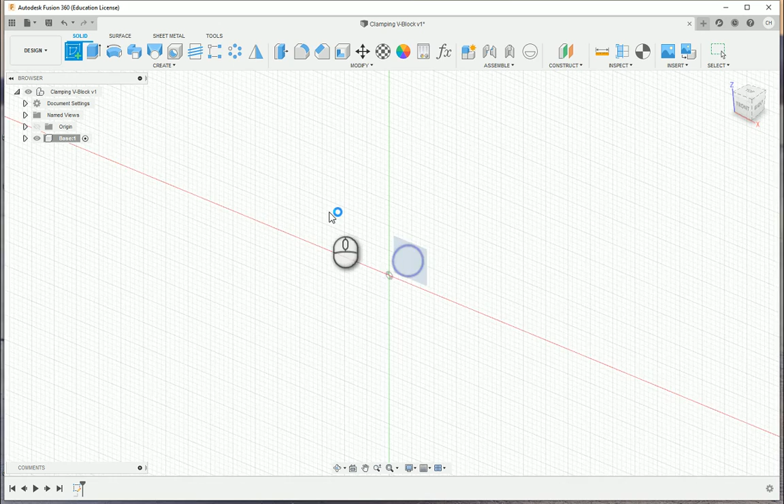So the first thing we're going to do is start a new component. I'm going to call this the base, and I'm going to go ahead and say OK. This is active now. We want to make sure the radio button is active in Fusion, and I'm going to go ahead and create a new sketch, and I'm going to choose the front plane. Before I start drawing, I want to make sure my units are set to millimeters.

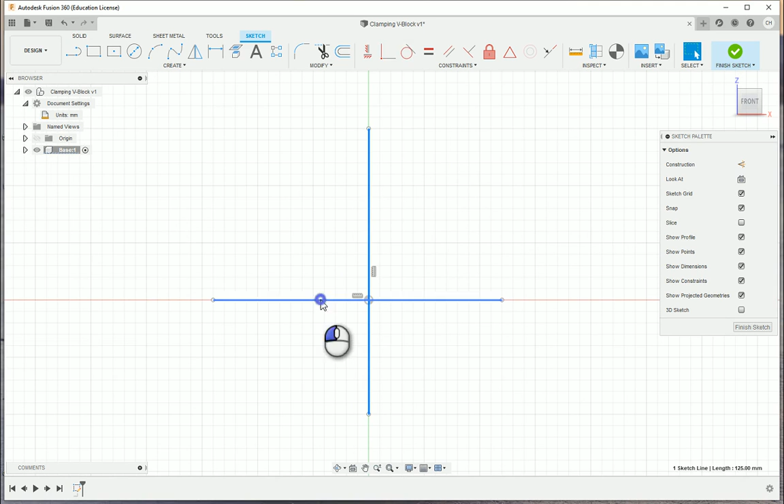And then from here, I'm going to create two lines. This is going to be a symmetrical part, and I'm going to develop two lines, almost like a quadrant system or a Cartesian coordinate system. I can select both of these and toggle construction. And then I'm going to use the midpoint geometric constraint, choose the line, and select the origin. The midpoint of those lines will be constrained to the origin. You'll notice how they turn black, and if I drag them, they can get larger or smaller based upon what size of sketch I need to create.

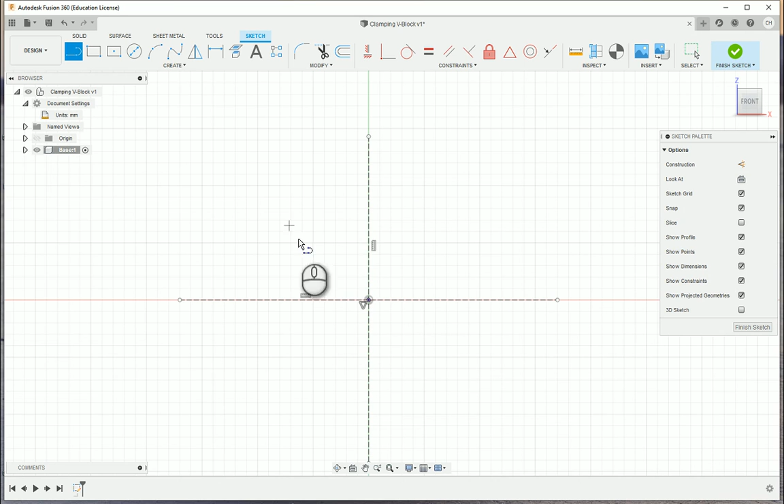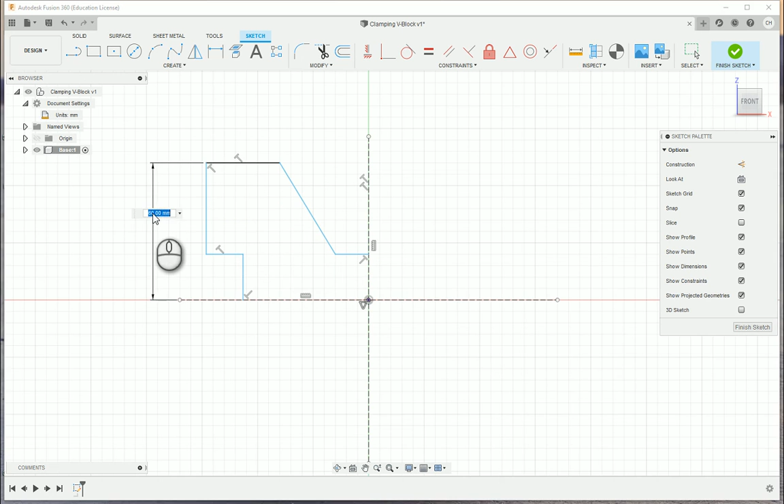But I'm going to end up drawing only a quarter of this part, and I can go ahead and start drawing some of that. One thing as we start drawing, you'll see that maybe our sketch will scale up or down. So just 1/4, and from here I'm going to go ahead and start dimensioning. The overall height of this part, and I'm going to use these lines, is going to be 30, so that's going to scale that down. It was about 60 when I drew it.

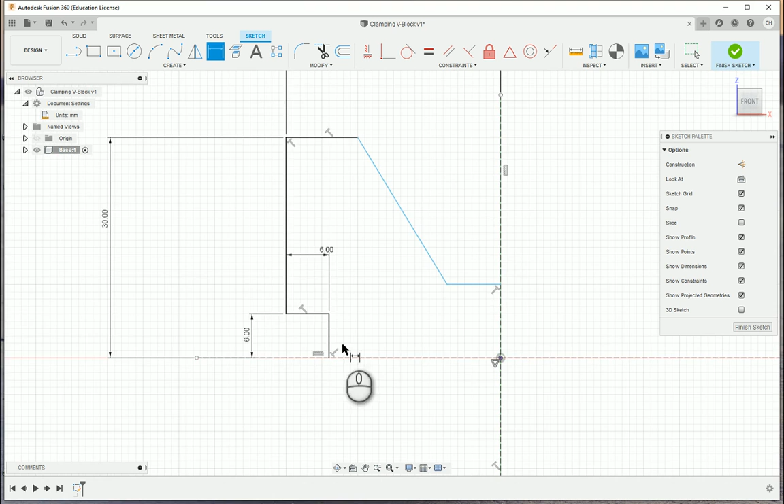And then the overall width, as I look from here to here, is also going to be 30. Now, some of this may change a little bit. You'll see this got a little bit shallow, but I can go ahead and click from here to here. This will be 6 millimeters. This height here will also be 6 millimeters. And then from this line to this corner, this is going to be 3. And then from this line to here, this will be 20.

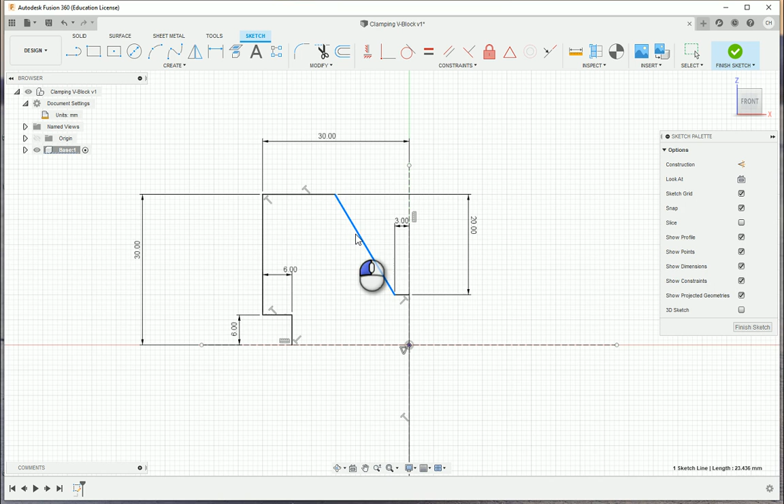Okay, so here's our problem: we may see that our line is still able to keep moving. So I think I did miss one dimension from here to here. This is also 20, and that will lock that into place.

Okay, before I move on to extrude, I'm going to go ahead and use the mirror tool, which can be found under the create panel. And it asks what objects I want to mirror.

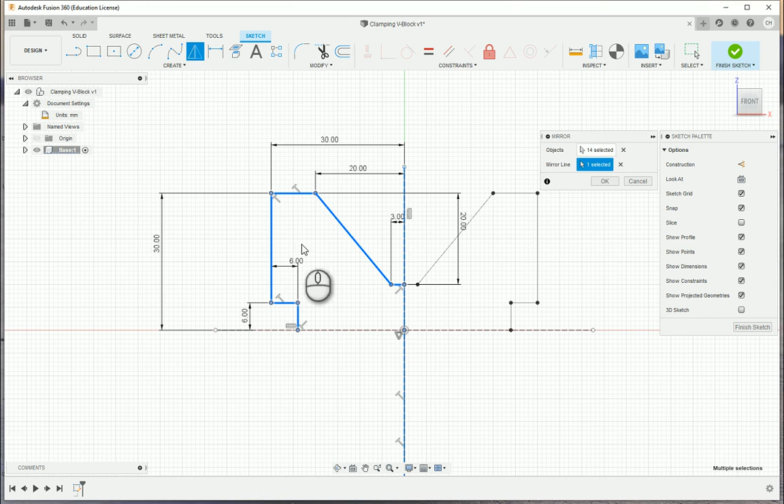I'm going to go ahead and click and drag to highlight all the lines that I need. And then I'm going to choose the mirror line. I'm going to choose this one. I'm going to mirror that over like so. I'm going to choose mirror one more time, highlight everything that I just did, and then choose this bottom line and say OK. Now we'll end up seeing that there's a full sketch there, fully dimensioned, fully constrained, and

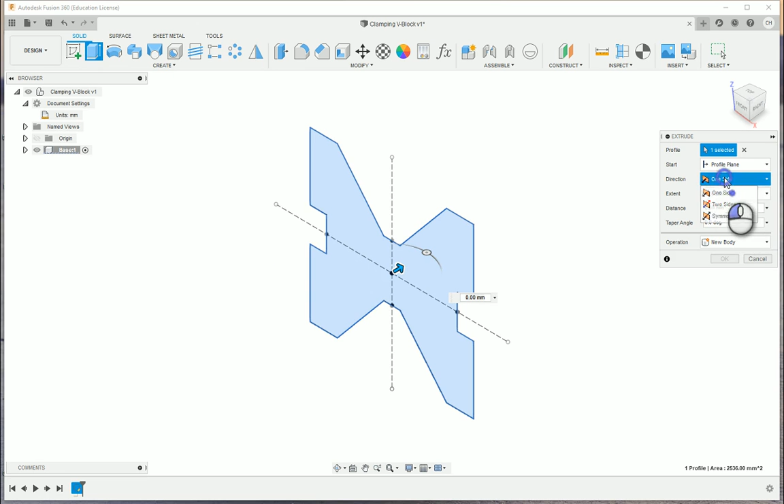ready to go. So I'm going to go ahead and finish the sketch. I'm going to go ahead and extrude. I'm going to do a symmetric extrusion of 100 millimeters. So for our block, right now this is set at half distance, so total this is 200. I want to choose the whole distance this way, so that way it's only 100 millimeters. So you'll see that there, and say OK. All right, so here's our base component all finished and ready to go.

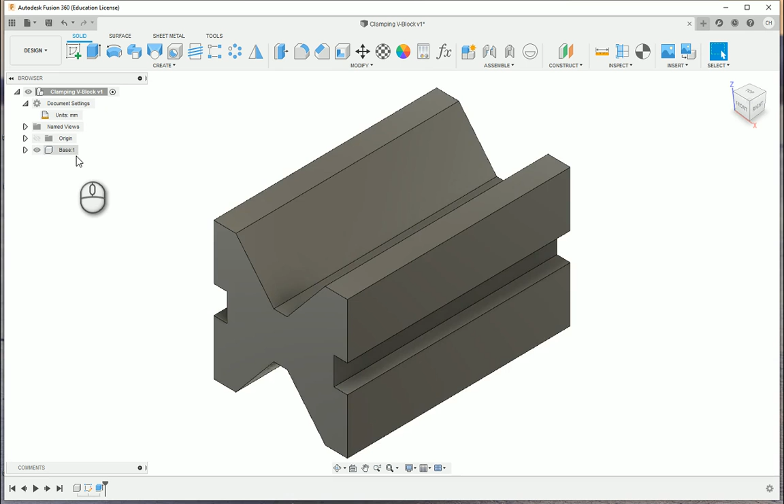What makes this different from the bottom up is I'm actually going to create another component with this component in mind in the same file. In order to do that, I want to go back up here to my main level and activate the top level components. Always, always important that you do that. There is a way to go through and get components out of there, but the best way is when you're done with one component, always make sure you're going back up there and activating.

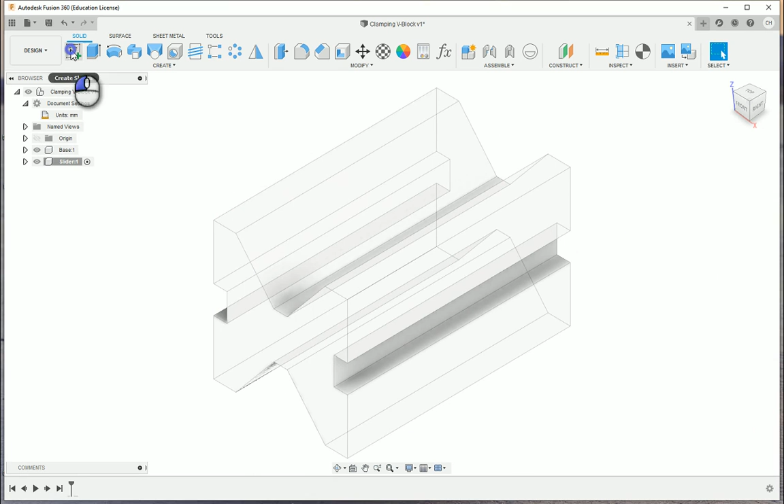So I'm going to choose a new component. This one I'm going to call the slider component, and I'm going to say OK. It's going to become active. The first component is going to be grayed out, but when you hover your mouse over it, lines will still highlight, and that's kind of the component part of it. So I'm going to say create sketch. I'm going to choose that front plane again.

Now in some of these cases it may be kind of hard to see. If you notice, my plane's kind of laying down, because I can also put it on the front or the back of this. So usually what I like to do is go to the origin and choose which plane you want to work from. I guess this would be in this case the XZ plane.

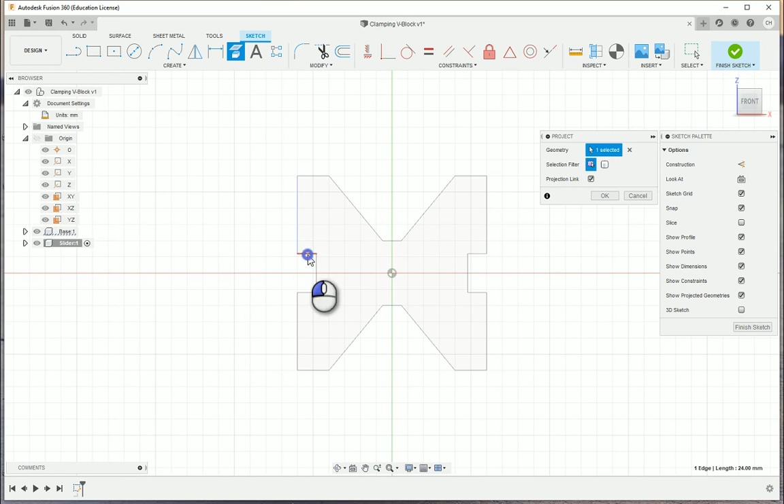So from here, for my slider, I'm going to hit P on my keyboard to project, and I'm going to use some projection lines on this one. I don't want to choose the entire object, but I do want to use these 4 lines, actually 5 lines there, to utilize for my drawing. I'm going to say OK. So those are going to kind of help me.

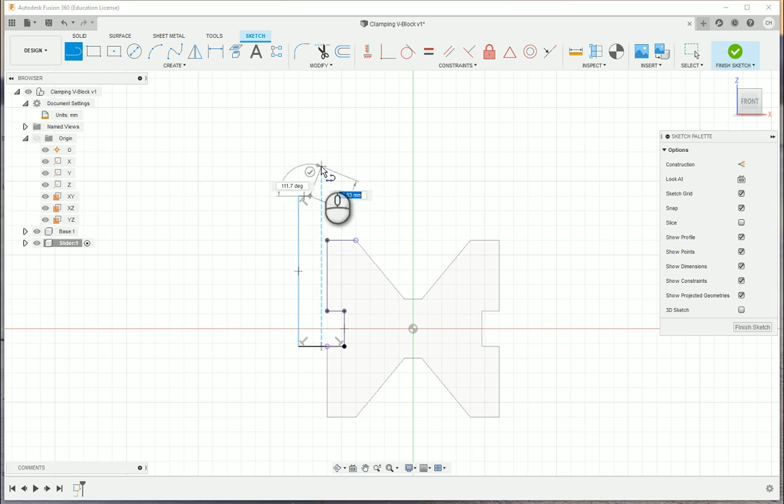I'm going to go ahead and use my line tool. From this corner, I'm going to draw out. I'm going to draw up like this, and I'm going to put a little point there. And then I'm going to do the same kind of thing: I'm going to go from the origin and draw a line straight up. And I'm going to make this a construction line. I can also right click and choose normal / construction line. I'm going to click the line tool again and set this little point right up here.

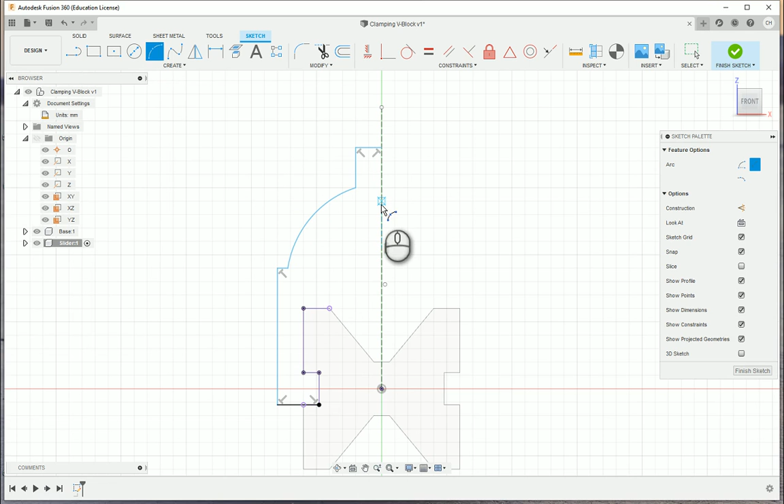And then we're going to use the 3-point arc, which we can find under the create panel. We can connect these like so, and then also we'll end up having a little bit of a line. You've got to be careful on this one because you can get the midpoint and it will constrain, and then you're not going to know where exactly you're hitting with your arc. So I just showed that with the line tool, but I can go ahead and click on this, and again you want to stay off of that midpoint. You want to try to click right about there.

Okay, so this is kind of the general shape we're going for. There's going to be a few fillet edges. Let's go ahead and get some dimensions on this beforehand.

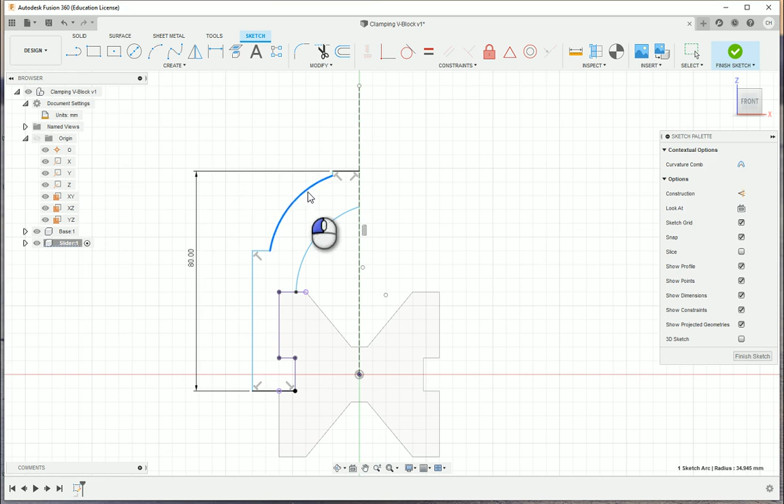I'm going to go ahead and do from top to bottom. This is going to be 80 millimeters. Your sketch may kind of mess with you a little bit, but you can always drag that down, so that way you can keep your shape.

One thing you'll see before we get too far is notice the center points for these arcs. One is right here for this arc, the other one's right there. So the one thing we definitely want is a horizontal vertical for this center point to the origin, and the same thing for this one. And then we want to make sure, using the coincident constraint, these two arc points have the exact same center point.

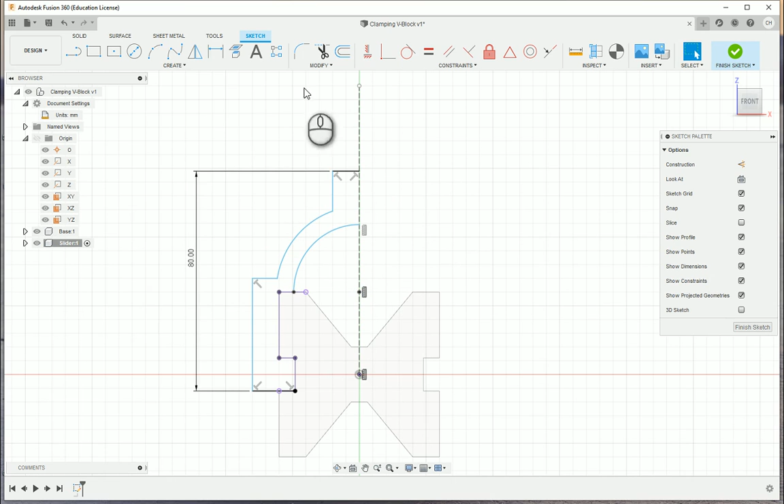So when I drag down, there you go, you're going to see that curvature happen. So then I can go ahead and put a 36 millimeter radius on this one. This one will be 24.

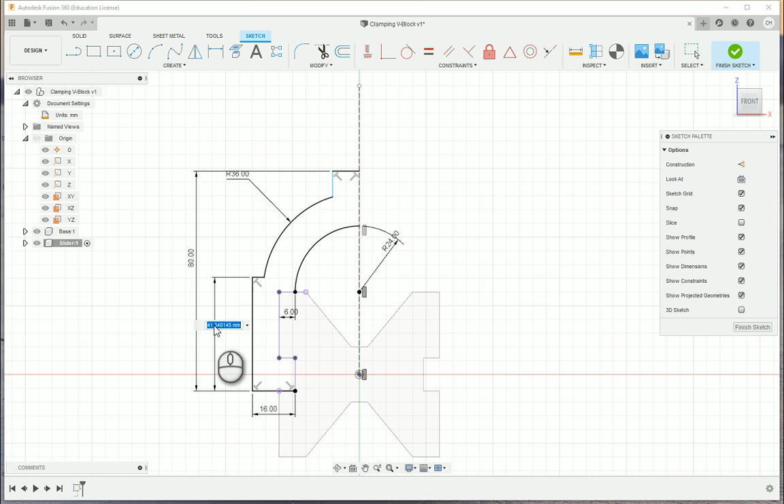The width of this here to here is going to be 16. So I had that one correct. And then looks like from here to here will be 6. And looks like the height from here to here will be 36. And then for the last part up here toward the top, from this side to here, this will be 12.

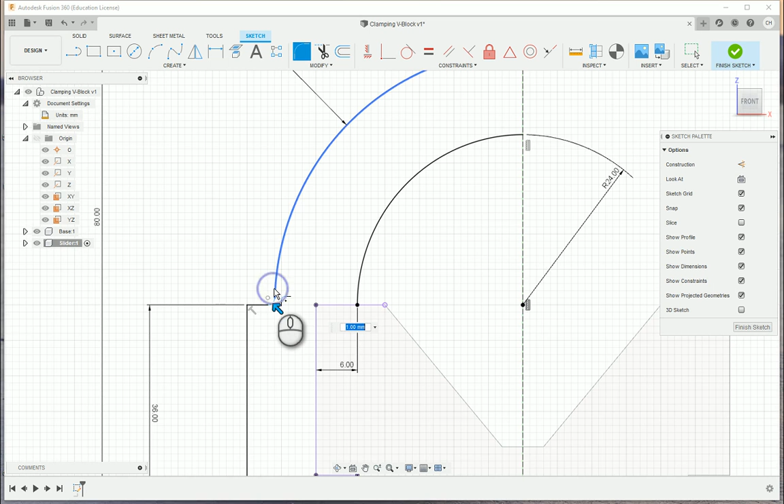Okay, there are a few little things, so I'm going to use the fillet tool. There is a round right here of, so from here to here, that will be 4 millimeters. And then there's one up here toward the top, which will end up being, based on my drawing, looks like it's going to be another 4 millimeters here as well. So fillet tool, 4 millimeters, and hit enter.

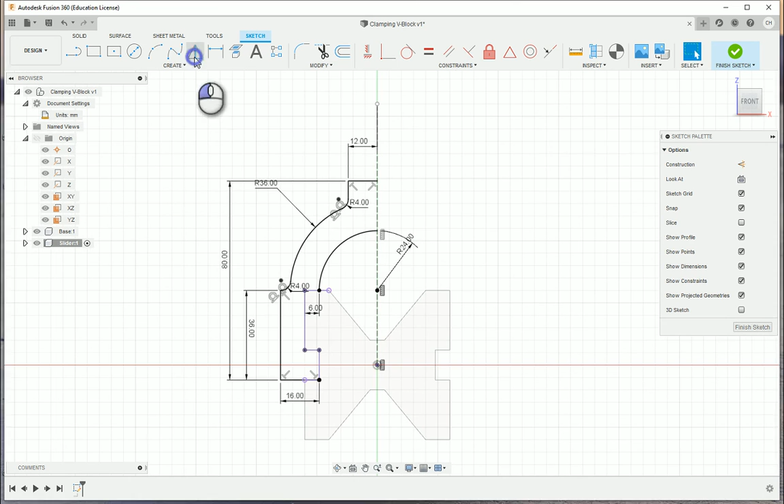Okay, so this is fully constrained at this point. The projected lines are going to help fill in the gaps. I can do like what I did before, mirror my shape and choose the mirror line to go over, and you'll see now I get a filled in shape. I can finish the sketch.

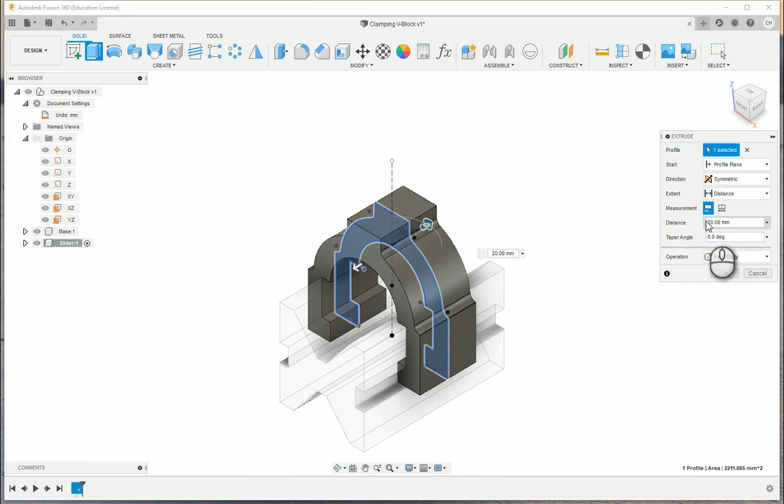I'm going to extrude this shape here. Same thing, I'm going to do a symmetric extrusion, and it's going to be 20 millimeters. And again, we want to choose a whole length for that and say OK.

The last thing I'm going to do is I'm going to create a new sketch on the top of it, on the rectangular face. I'm going to create a center diameter circle. And with that, I'm going to choose the dimension tool. The diameter of this is going to be 12.

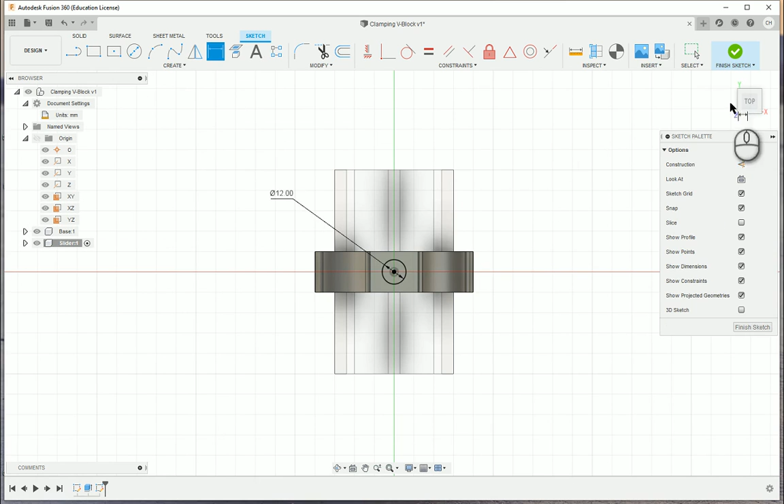And then the rest of this is going to be fully constrained. I can extrude, choose the circle. I could start to cut. One thing that I can do is instead of distance, I can say to object, and then I can go ahead and click right on the inside face, and it'll stop right there and say OK. And this will finish out the slider component.

And at this point I'm going to stop. So we got two more components to add in, and then we'll take a look at some joints and maybe editing some joint limits for this assembly.

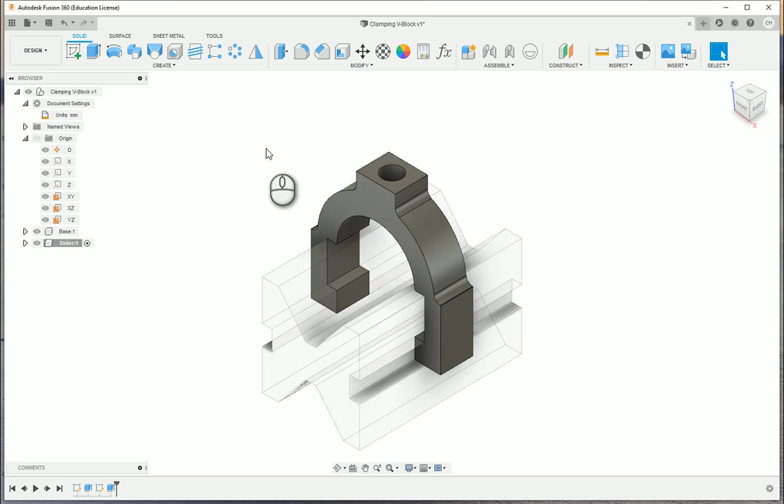But once we're done, let's go back up to the top level and activate the component. Now you'll see both of these. You don't want to click and drag on these two parts because they are not constrained together yet, even though it looks like it. We'll need to use some joints in here to go through and make that happen. But in the next video, we'll take a look at the next two components.